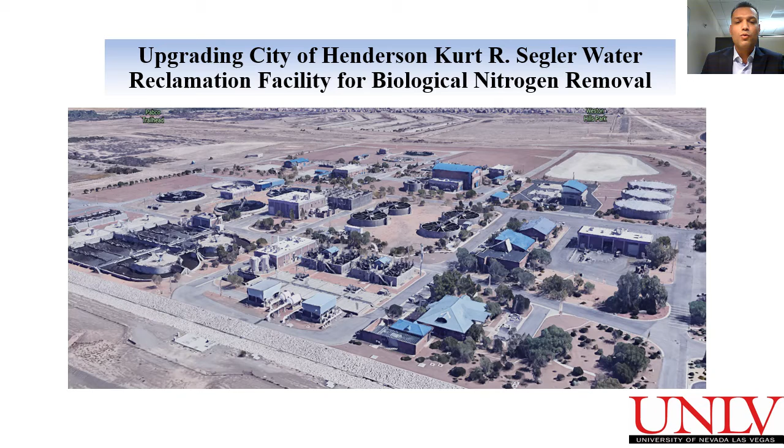Iqbal Khan, professor in the Civil and Environmental Engineering and Construction Department at University of Nevada, Las Vegas, is the faculty advisor on this project. He assembled the student group and supervised the development of the design documentation.

Feedback, regulations, and design considerations were provided by Sabrina Rivera, our project advisor from City of Henderson Water Reclamation Facility. She also provided input and helped coordinate with the City of Henderson Water Reclamation Facility administrators for background data.

Hamid Haydari, Padmanabhan Krishnaswamy, Yasamane Saidi, and Julian Guerrero are the presenters, and other members are Saeed Masroora, Qazi Shafat Haidar, Neil Christian Tugadi, Nina Ejada, and Amanda Page.

Henderson is the second most populous city in Nevada, adjacent to Las Vegas. The population of City of Henderson is almost 330,000, and their main wastewater treatment plant is Kurt R. Segler Water Reclamation Facility. This facility was constructed in 1994 and upgraded in 2008. The treatment capacity of Kurt R. Segler is 24 million gallons of wastewater per day.

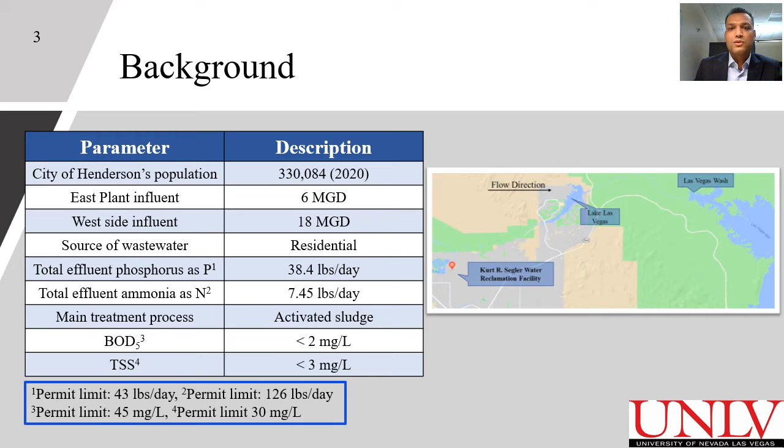The influent to the facility divides into two sides, west side and east side. The west side can treat wastewater up to 18 million gallons per day, and the remaining 6 million gallons per day goes to the east side. This facility mostly treats domestic wastewater. You can see effluent amounts of selected parameters at the end of the table.

The influent data that our student chapter was authorized to use was between 2012 and 2016. The facility flow profile in 2015 was chosen because the maximum and minimum influent throughout the year is quite visible. As demonstrated in the graph, around New Year the influent to the facility increases, due to the fact that Las Vegas is an international tourism destination, and for financial savings some tourists reside in City of Henderson.

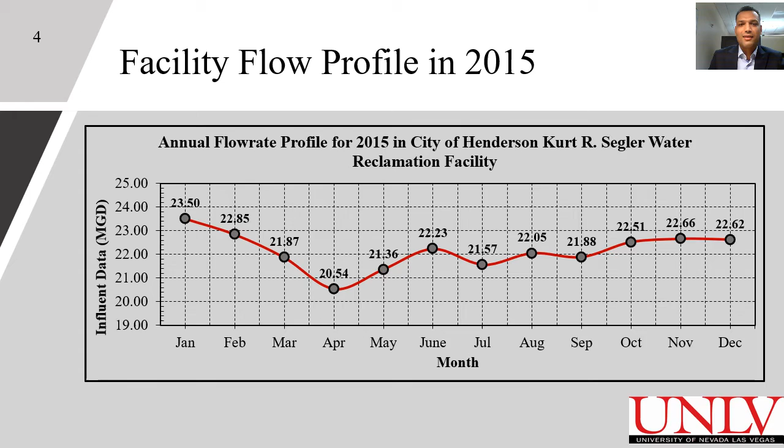The facility does not have a primary clarifier, as they want to exploit all the organic capacity they can get to remove nutrients. The design of the plant centers around activated sludge treatment, which provides biological treatment.

The raw sewage enters the bar screening to wash out the water debris before discharging it into a garbage can. This wastewater flows to an aerated grit chamber that facilitates the sedimentation of heavier inorganic materials. Then two horseshoe-shaped basin oxidation ditches, each able to treat up to 12 million gallons of wastewater per day, treat the wastewater. Treated wastewater then pumps to the secondary clarifier and separates into waste and treated water.

The waste activated sludge goes to the solid waste processor, and some of it goes back to the oxidation ditch, which is to increase the sludge for biological removal. Treated water goes through a series of filters, is disinfected by UV, and discharges to the environmental buffer, here Lake Mead.

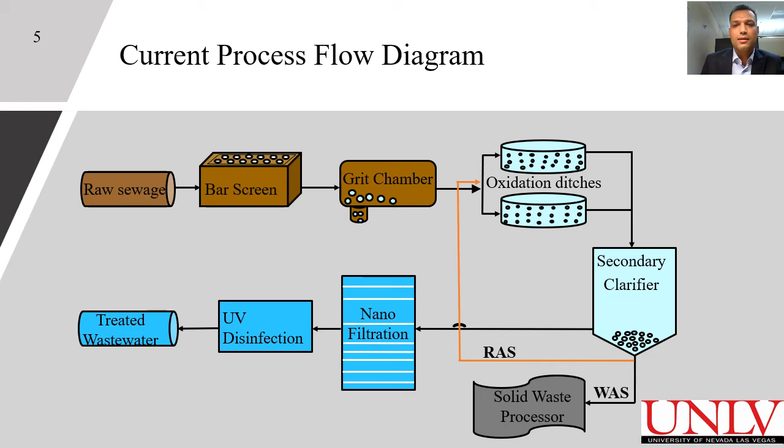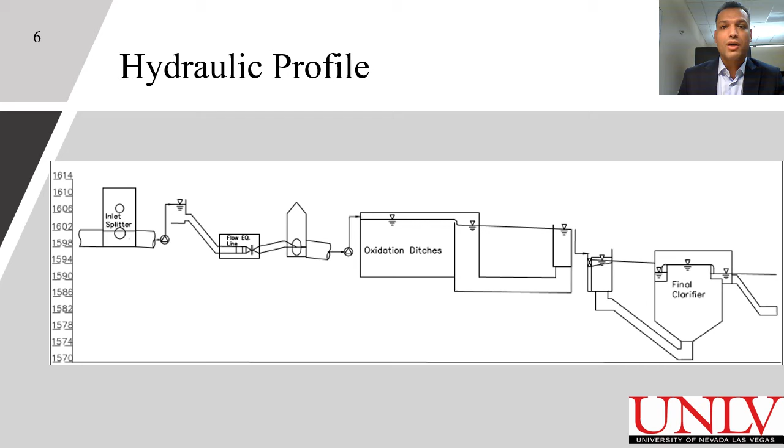A hydraulic model was developed to simulate the hydraulics of the treatment plant based on existing plans. A common system to use in a wastewater treatment plant is gravity flow, to save energy and costs. But City of Henderson Water Reclamation Facility uses a pump system to generate flow with enough power to overcome pressure induced by the load at the pump outlet.

The main concern identified by University of Nevada, Las Vegas, Nevada Water Environment Association student chapter is nitrogen removal. Although there are other concerns such as damaged structures, rusty equipment, debris that passes behind the grit chamber, and stagnant zones behind turbines in the oxidation ditches, these exacerbate the main concern, causing a decrease in the efficiency of nitrogen removal from wastewater.

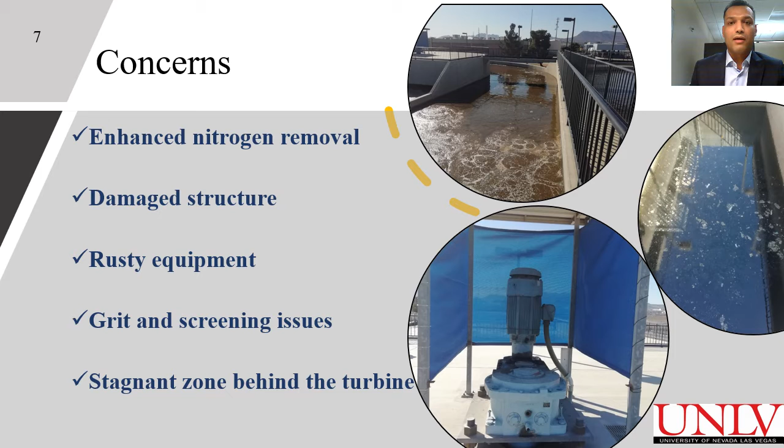In current oxidation ditches, we evaluated the facility conditions and considered the economic crisis caused by COVID-19, and suggested a design that will work to 2050 so that City of Henderson does not need any more upgrading before that time.

According to our estimates and future demographic data released by City of Henderson Municipal, the population will increase to around 555,000, and the facility requires treating up to 32 million gallons of wastewater per day.

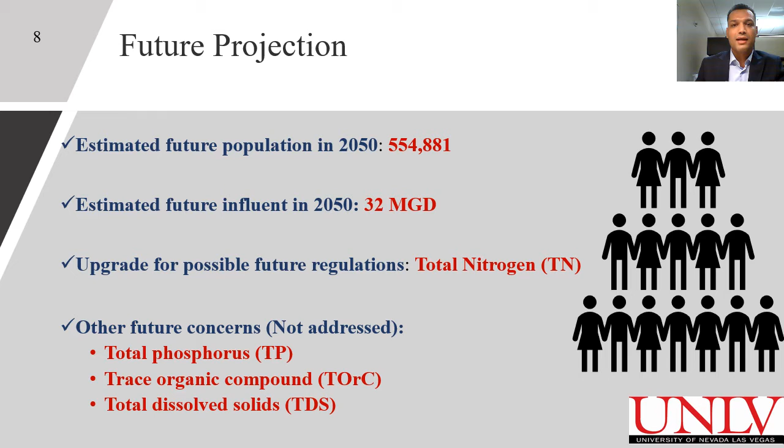The considerations for upgrading revolve around total nitrogen removal for future regulations, but it is also applicable for other future concerns such as total phosphorus, trace organic compounds, and total dissolved solids.

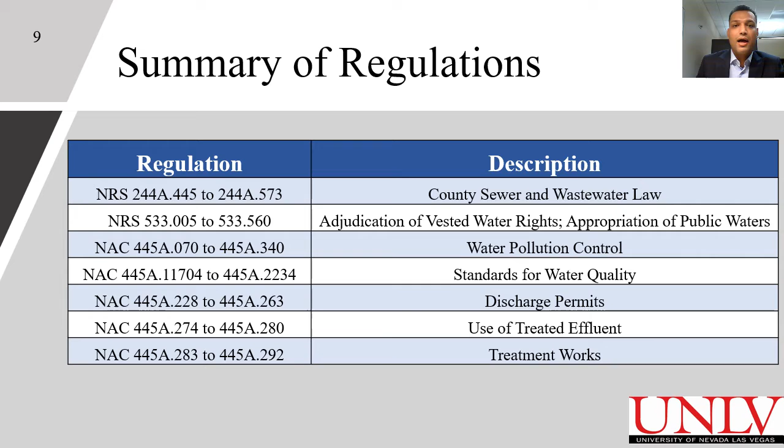There are different regulations that City of Henderson Water Reclamation Facility has to comply with, but the discharge permit is of great importance due to the algal bloom that occurred at Lake Mead in 2001.

The discharge permit monitors the effluent quality into Las Vegas Wash and Lake Mead to maintain and protect the beneficial uses of Lake Mead, such as propagation of aquatic animals and wildlife, supply of municipal and industrial water, and recreational activities.

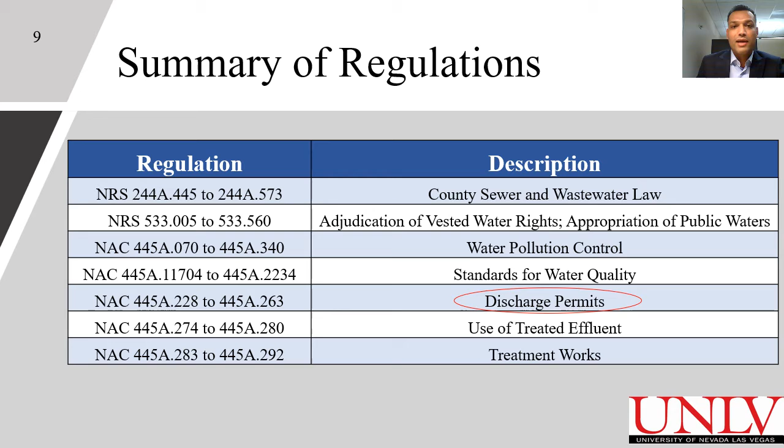The goal of our group is to improve and enhance nitrogen removal by introducing a cost-effective and energy-saving process. Compliance with future regulations was also taken into account.

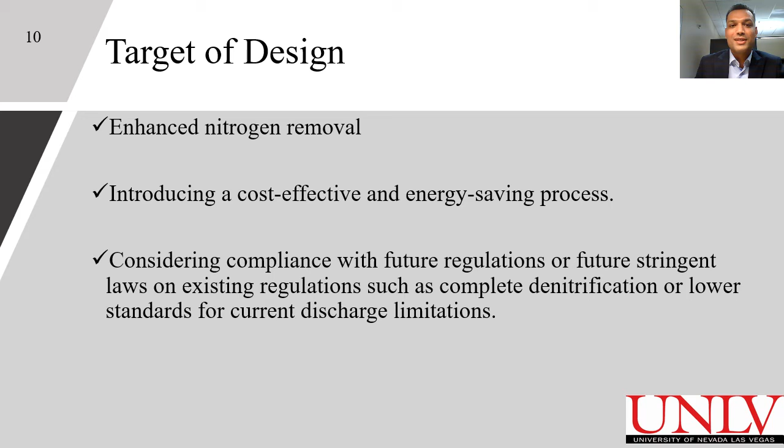Hello, I am Padmanabhan Krishnaswamy, currently pursuing my Master's in Civil and Environmental Engineering at UNLV. I will be talking about the alternatives and the decision matrix that led us to choose the most suitable alternative.

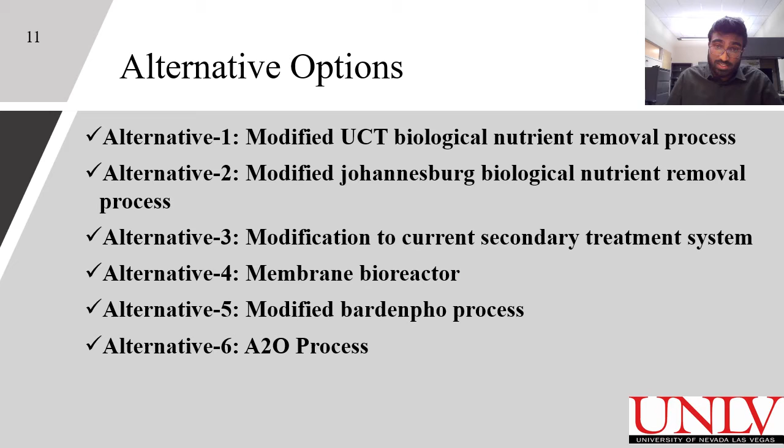In order to help us decide which alternatives to choose, we used the Kepner-Tregoe method to develop a decision matrix. The key factors taken into consideration in the decision matrix are the 50-year present value cost, social and environmental elements, treatment considerations, regulatory compliance, and ease in implementing the process.

Each alternative's key factors will have a score weight in the range of 1 to 10, and the alternative that receives the highest total score will be the one chosen for the design.

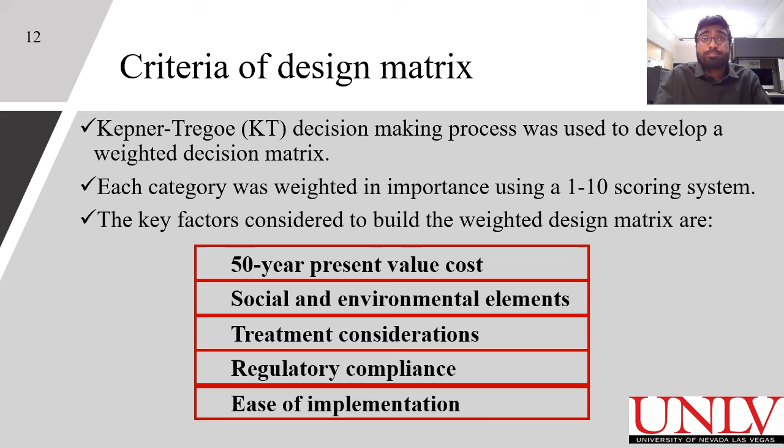In order to score each process, their respective advantages and disadvantages are compiled and taken into consideration. This slide will not contain the modifications on the current secondary treatment system, because its biggest advantage is that it is the least expensive to implement.

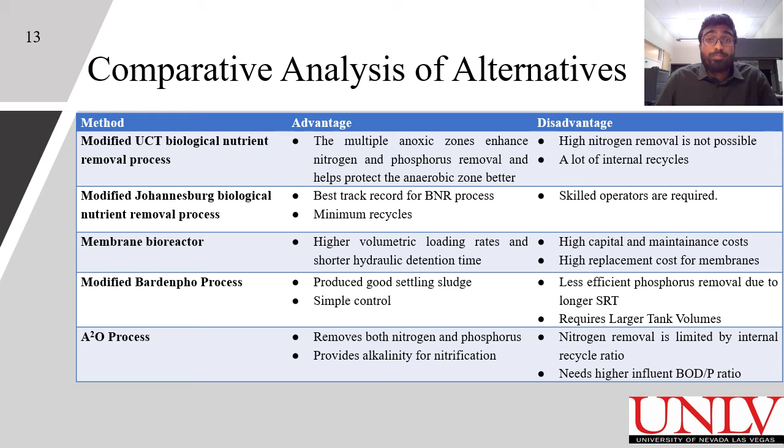Based on the score weights for each criteria and subcriteria, the performance score for each alternative was calculated. Details regarding the calculation are provided in the report. As you can see from the highlighted portion, alternative 3, which is the modification to the current secondary treatment system, received the most score. So we decided to go with that process in the upcoming steps.

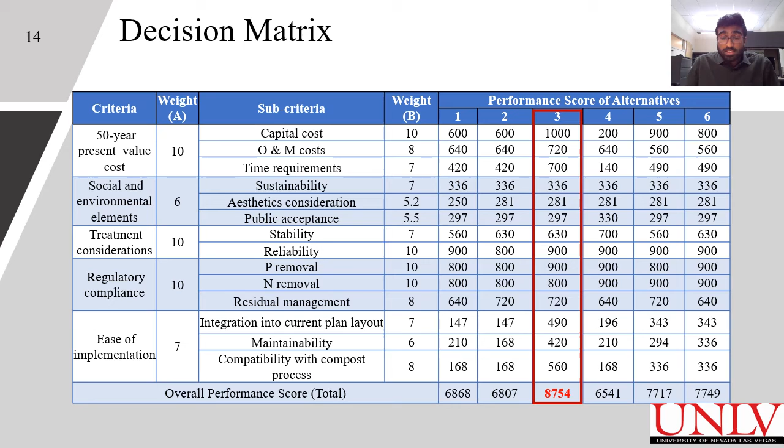In the chosen process, the most economical approach for modifying the current system is to provide an anoxic zone prior to the existing ditch. By doing so, nitrification can be achieved in the aerobic zone and denitrification can be achieved in the anoxic zone. However, mixers will be needed at the anoxic zone in order to keep the biomass from settling.

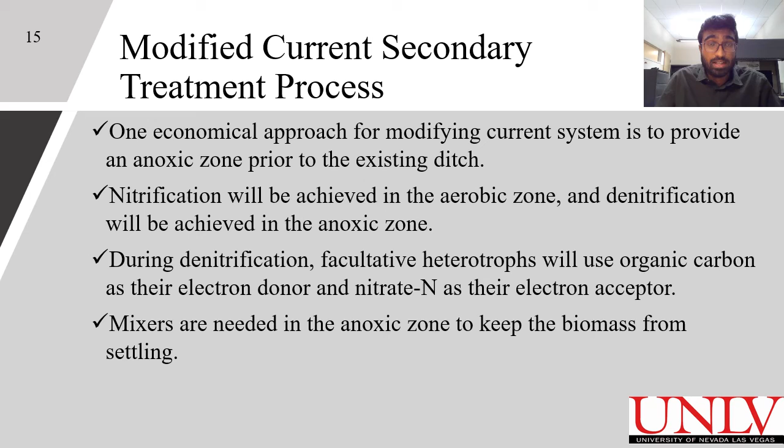So by choosing this process, the advantages include ease in implementation. It's very simple to operate. It also uses less energy than extended aeration. It has well-stabilized sludge with low biosolids production. And most of all, it's the most economical alternative.

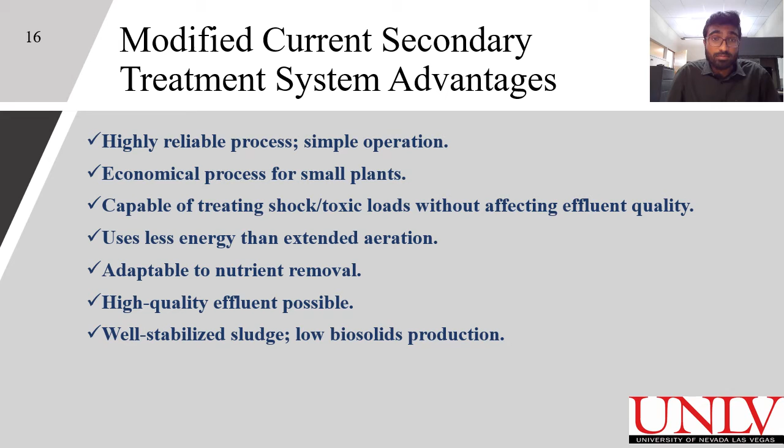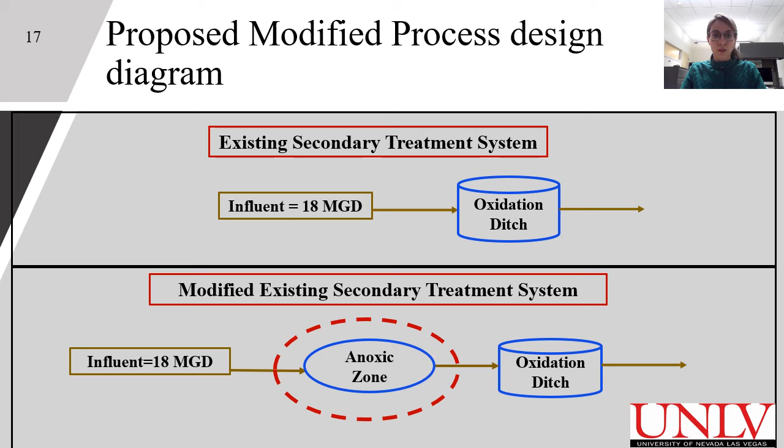In this slide, I'm going to go over the proposed modified process design diagram. The existing biological treatment consists of influent coming from the pumping station, goes to oxidation ditches, and then it goes to our sludge handling system. In the modified existing secondary treatment system that we are proposing, we are adding an anoxic zone prior to the oxidation ditches to improve our nutrient removal.

In our process design specification, the recommended dimensions for anoxic tanks are shown in this table. You can see the typical value for depth for a circular tank will be between 9 to 16 feet, and the range for diameter will be between 9.8 to 196.8 feet. The bottom slope, inch per inch, would be 0.045 to 0.063.

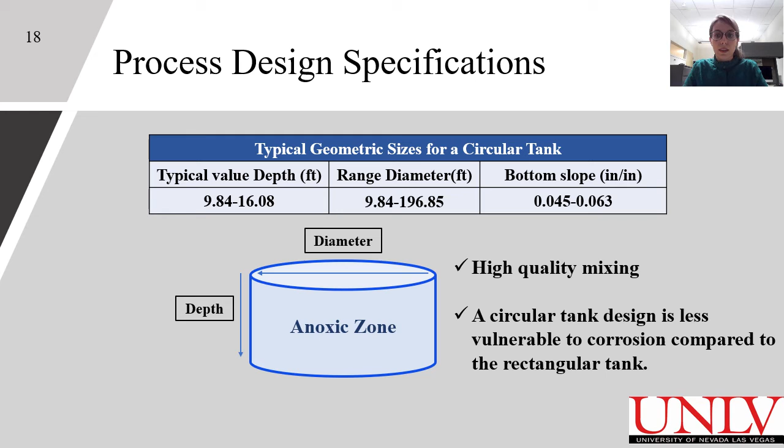The reason that we chose a circular tank for our design is because we can reach high quality mixing in the circular tank, and a circular tank design is less vulnerable to corrosion compared to the rectangular.

The anoxic tank design is for 18 million gallon volume as influent. With the consideration of space availability and ease of maintenance and operation, 3 million gallon per day capacity of the tank is chosen with a retention time of 3 hours.

The depth was calculated to be 14.76 feet, which was in the range. The diameter was 65.74 feet, which was again in the range that we can design for our circular anoxic zone.

The total number of tanks that we need for 18 million gallon per day wastewater was 6, and we need 1 spare tank. So in total, the number of tanks required for treating 18 million gallon per day wastewater is 7.

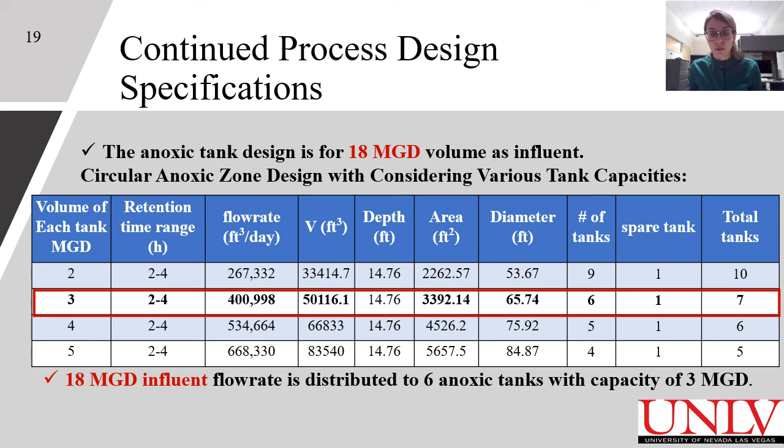This is a modified process design diagram for the secondary treatment system. Here we have influent coming from the pumping station, and here the 6 anoxic zone tanks that we proposed with 1 spare tank. After this stage, the flow goes to 2 oxidation ditches with a capacity of 12 million gallons each. Then we have the secondary clarifier and sludge handling system.

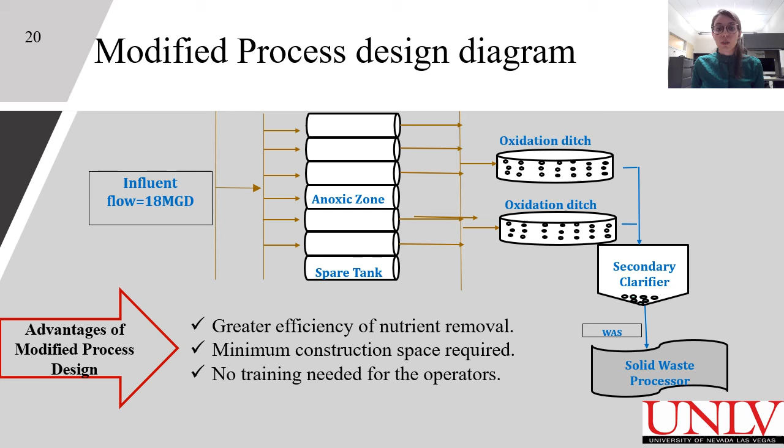The advantage of the modified process design is greater efficiency of nutrient removal, minimum construction space required, and no training needed for the operators in the wastewater treatment plant.

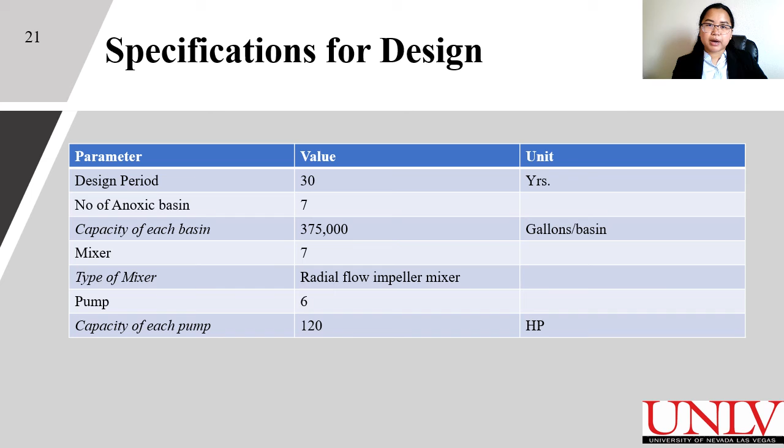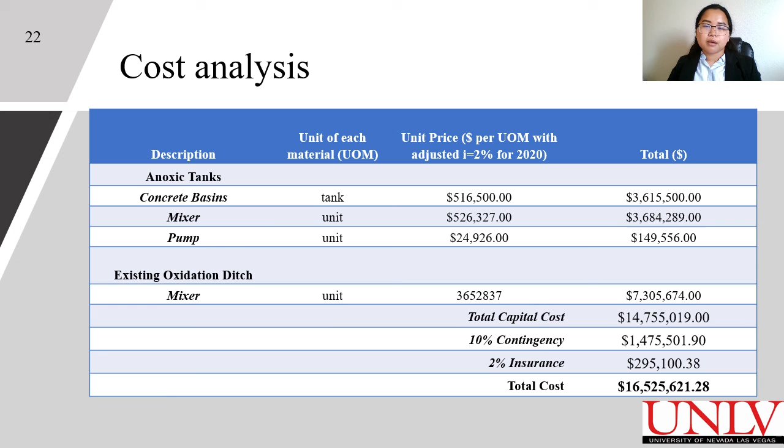This results in an estimated total capital cost of $14.8 million. Assuming a 10% contingency and 2% insurance, the total cost for the proposed project becomes $16.5 million.

Summary and recommendation: to reiterate, we recommend oxidation ditches because they provide excellent treatment and are simple to operate. Secondly, we recommend modifying the current secondary treatment system to include an anoxic zone to achieve denitrification and meet the more stringent discharge standards. Furthermore, to reduce corrosion in the basin, we recommend epoxy-based powder coating for the inside wall and the floor of the basin.